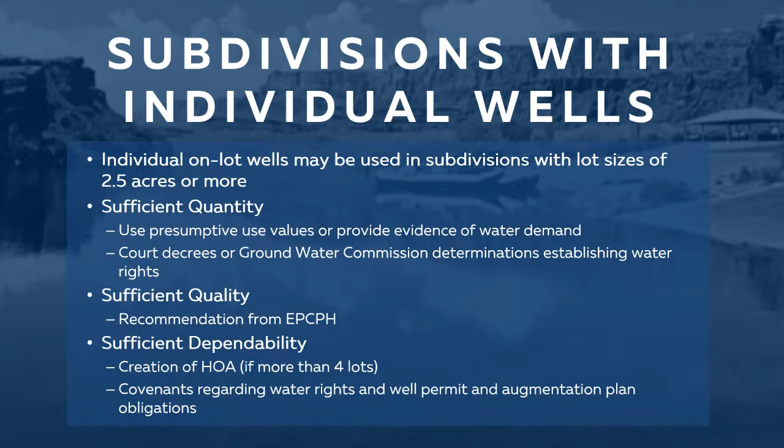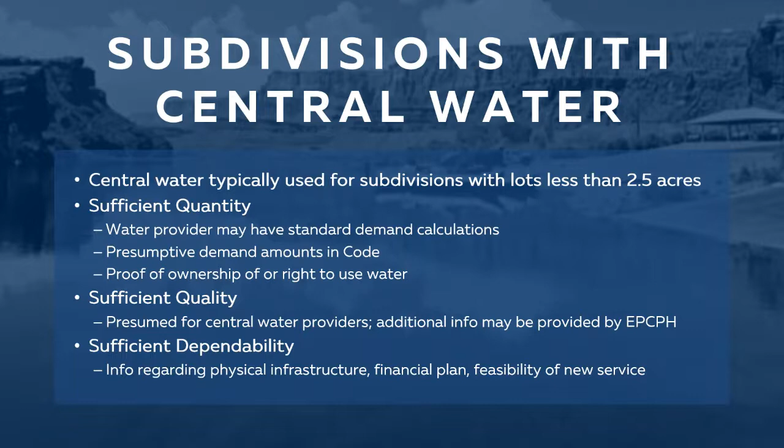Next slide. New central water systems occasionally arise when central water will be supplied, but there is no existing provider willing or able to provide that water. And so when you are creating a new central water system in connection with your development, just a couple of highlights and tips. Pre-planning is key here. It can take up to a year or more to get the state approvals for a new water system that we require in order to support a finding of sufficient water dependability.

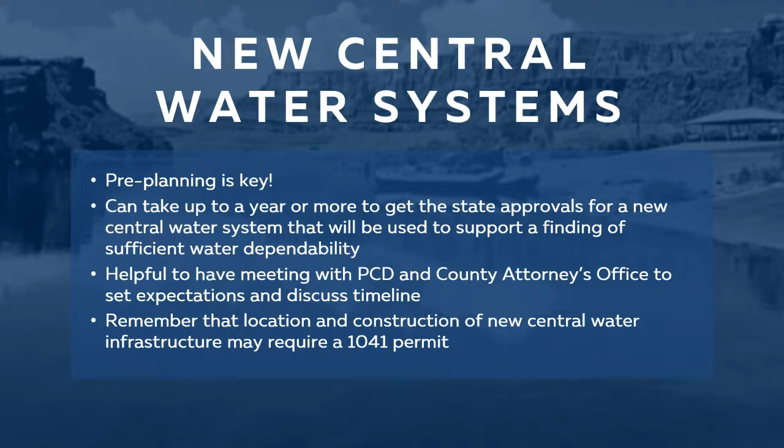We have to determine that the construction and the approval of the system is advanced enough that we can comfortably recommend that the water supply is dependable. It is helpful to have a meeting with the Planning and Community Development Department and the County Attorney's Office early in the process to set expectations and discuss timelines in terms of what will be required and when for this process. It's also important to remember that when you are constructing a new central water system, that location and construction of that infrastructure may require a 1041 permit, which is a separate application and a separate process.

I think I'll pass it on now to the state in order to discuss new water systems in more detail. So Nina, I think this is Tyson's turn. Do we have him on the line? Yes. Wonderful. Hello, everybody. Can you hear me okay? We sure can. So if you want to go ahead and discuss new water systems. Great. So you're on slide, what is the public water system, correct? That is correct. So we are on slide number 13.

Great, thanks. So my name is Tyson Ingold. I work for the Colorado Department of Public Health and Environment, the State Health Department, and we regulate many different things. We've been very busy with the pandemic, but we also regulate public water systems and implement the Safe Drinking Water Act of Colorado. So I'll be discussing what qualifies as a public water system, what our oversight looks like, what types of things you have to do if you're a new development, for a few slides, and then obviously around for questions.

So I think first and foremost, let's talk about what is a public water system. That is a definition provided for us by the U.S. Environmental Protection Agency and the Safe Drinking Water Act, an old definition from the 1970s. I'm not going to read the definition, but the rule of thumb for a development is if it supplies 15 service connections or 15 homes, it's going to be regulated as a public water system. But there is also a second part to the definition, which sometimes means that systems that don't have 15 homes also are regulated as public water systems, and that's the 25 or more for 60 days a year. And I'll explain that calculation in a sec.

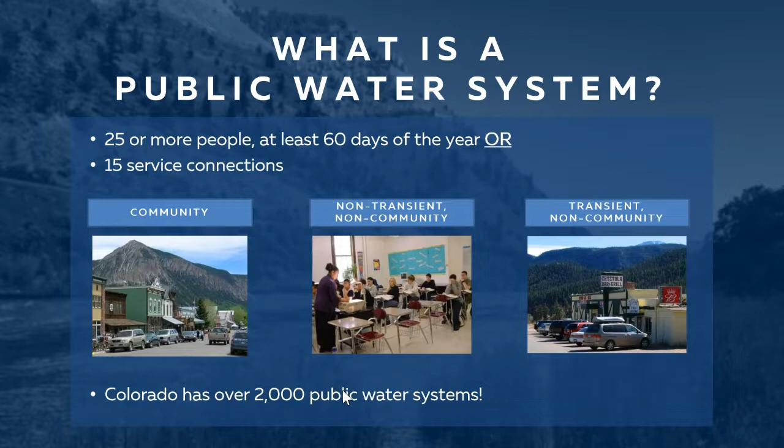To go on this slide, this is state regulatory requirements. Anybody building a new water system needs to come into the state for design approval on several levels. And this is really established on a few different scales. It's in state statute, but it's also in our drinking water regulations that you must submit for approval before you begin construction of any water treatment or before you turn on a well. So that can be confusing because you sort of do have to drill the well through the Division of Water Resources to get us the data we need for you to move forward with the drinking water design. So it's kind of a two-phase deal.

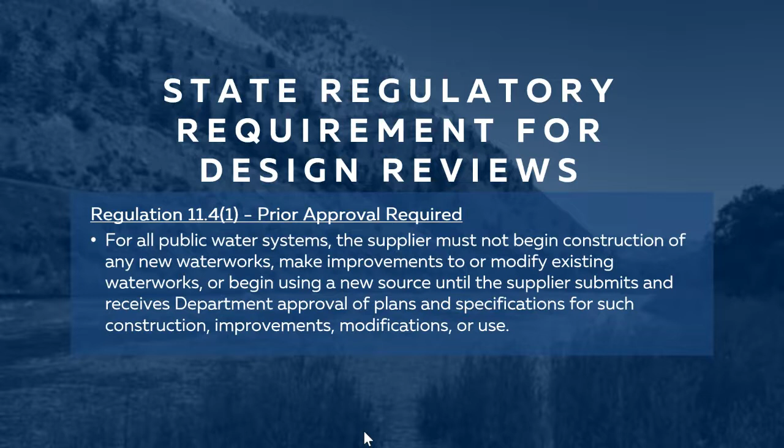You develop your sources, but then you gather some data and submit to us and get approval before you go on and develop the water treatment and the rest of the system. And that is required in our regulations. You're in violation if you do it without our approval. For brand new developments, in the next slide, there's a second requirement.

If you're going to be a community water system, you must establish that you have what we call capacity: technical, managerial, and financial. In other words, you need to establish that the water system will be viable in the long term, both in how it's operated and managed, and also how it's financially set up so that it can pay to replace pipes as they break, or new water treatment, or to develop replacement wells when they reach their working life, those types of things.

So you'll be sharing with us the overview of your system, but also how it can be managed and operated, and also how the finances are going to work. And that's called the TMF Capacity Planning Manual, or Policy 11, but you must submit and get approval of that. And that's kind of a standalone document. If it's a brand new, built from scratch development, we need to do that piece in the community.

And then also for treatment, sources, and storage tanks, the next slide talks about a basis of design report that must be filled out and submitted to us. And that's the second thing. It's Appendix B of our design criteria, but it goes through your system, and we want to look at how all of your water infrastructure is designed. And really what we're primarily focused on is your source, and your water treatment, and then any water storage tanks. The actual pipes in the ground, we have design standards for. We don't typically do too much of a review of those.

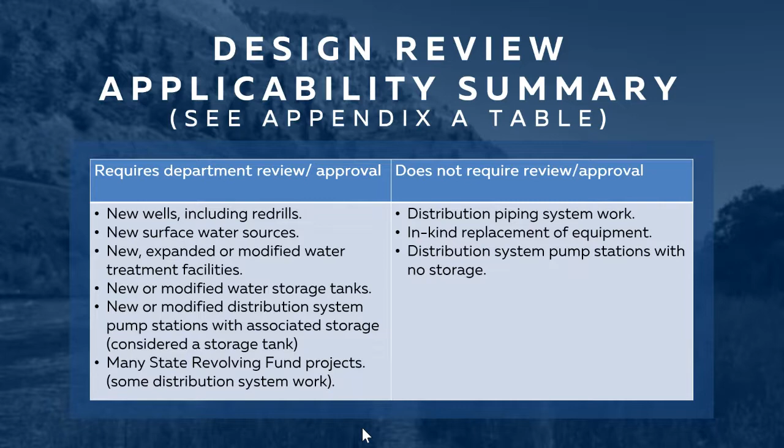And that's kind of the limit of what I'm going to talk about. I'm going to hand it off, but I'm obviously here for questions. Thank you. That was great.

So now we're going to get into the actual sufficiency review process, and we'll discuss how planning and community development coordinates with the applicant, as well as the state, our county attorney's office, our health department, and the various hearing bodies to ensure that a finding of sufficiency can be made. So first and foremost, let's discuss what documents have to be submitted to the county. All of our documents are submitted online through our EDARP program. We do all of our applications and all of our reviews online.

The absolute minimum documents to be submitted would include the water supply information summary sheet, and the state is going to go into more detail about the content and what they're doing in their review of that document. The water resources report does have to be prepared by a qualified professional, specifically a hydrologist, a licensed civil engineer, a qualified groundwater geologist, or some other qualified professional that has the appropriate experience. So this is not something that an individual homeowner would be able to prepare on their own.

It also needs to include documentation and information to support all three elements of the finding of sufficiency that Ms. Segal went over, including quality, quantity, and dependability, so that we can make that finding. Next, Section 8.4.7 of the Land Development Code outlines the specific requirements and content for the water resources report. Additionally, sometime this summer, we anticipate that we will have some actual checklists that applicants could use to quality control their water resources reports before submitting to us.

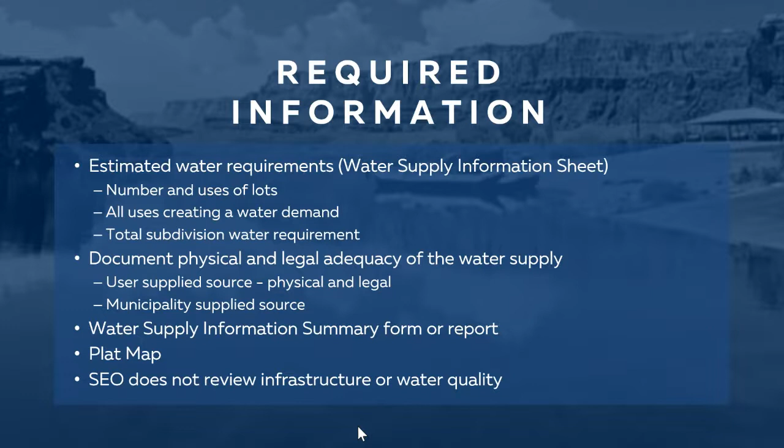We do our review. We are checking to make sure that the proposed uses are consistent with the allowed uses of the proposed supply of water. And in designated basin, which is a geographic area along the eastern half of the state, there are specific rules about exporting water outside of those basins. Because they rely on that groundwater, it's an area that doesn't have a lot of surface water available. We want to make sure that where they're using that water is appropriate and legal. They also have specific groundwater management district rules that might come into play, so we cross-check those.

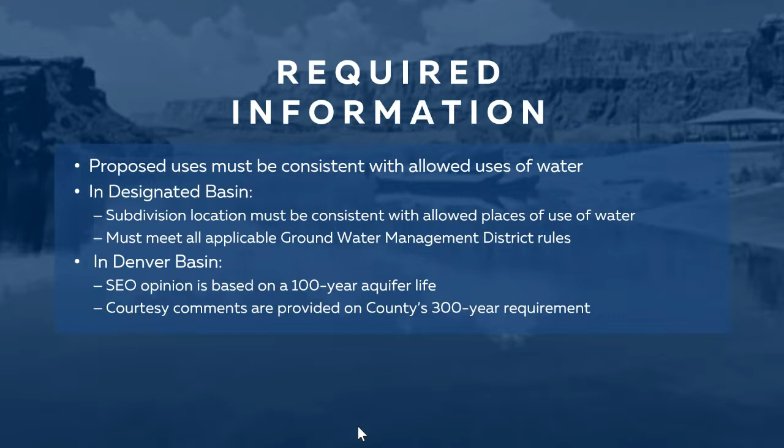The Denver Basin is a series of aquifers that are layered along the Front Range. They also have their own set of rules that we need to check. As Lori said, statewide we rely on a 100-year aquifer life for our determination, but El Paso County has taken that additional step to make sure that a 300-year aquifer life is available. So we'll offer that review as well. Next slide, please.

For a supplier via municipality or a quasi-municipality, we'll check the statement of commitment from that supplier. In particular, we really want to see a firm volumetric amount that's been committed to the proposed subdivision. Sometimes we'll receive letters that say things like, yes, this project is within our boundaries, but we really want to make sure that they do have an available amount of water that meets the demand for the subdivision and to make sure they have enough water to supply that water.

One way we check that is the report that was mentioned that documents what the legal supply of water is for that municipality, as well as the commitments they've already made to other projects. We want to make sure that they're not overextending themselves and that there's not limitations on their supply of water for where they can offer that water or the uses.

Occasionally we will ask for an updated report. We do keep those reports on file in our office. In particular, if the report is more than 3 years out of date, or if the supplier has committed more than 90% of their available supply, we'll ask for an updated report just to make sure that we're not running into any trouble. Next slide, and Finlay, please.

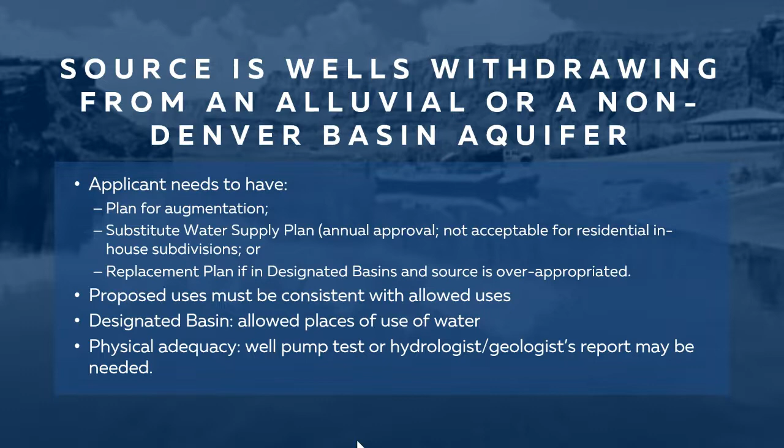So if the source are wells or a well from a Denver Basin aquifer, that can either be from water that's been formally allocated or water that has not been allocated. So water can be allocated inside Denver Basin either through the issuance of a non-exempt well permit or a decree from the water court, or if you're inside designated basins, through a determination of water rights.

If you're in a not non-tributary source, so the aquifer has some hydraulic connection to surface water, the applicant would also need a plan for augmentation approved by the water court, or if you're inside designated basins, you would need a replacement plan for sources that are not non-tributary with an actual replacement requirement. Next slide, please.

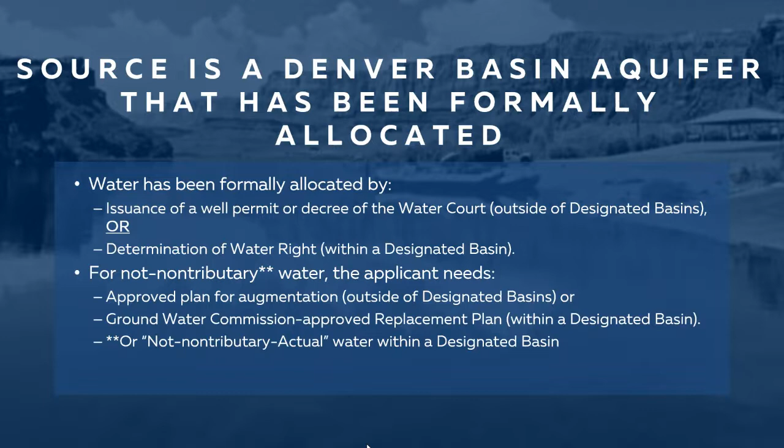And then for wells that are withdrawing water that has not been allocated, that would be a small capacity well permit if you're inside designated basins, or an exempt well permit if you're outside of designated basins. These well permits aren't typically associated with a water right, so the water that the wells are withdrawing is not allocated. If you're inside Denver Basin, if you are in a non-tributary source and you don't have water that's been allocated, sometimes you can still use those wells, but in this subdivision, the wells would need to be re-permitted according to the new parcel size.

So if you're in a non-tributary source, it depends on if you're subdividing or not, whether you need to re-permit the wells. If you are in a subdivision, the amount of water that's allocated for each parcel is calculated by using the land area over the aquifer. So for subdivisions where there are multiple lots of different sizes, we look at the amount of water beneath the smallest lot. So that's the minimum amount of water available, and compare that to the estimated water demand that's been proposed and make sure that those are in agreement with each other.

You can't have parcels that, quote, borrow land from other parcels to increase the amount of water available. So for example, if you had a 10-acre lot and a 30-acre lot, the 10-acre lot can't borrow land area from the adjacent lot in order to increase the amount of water available when we're reviewing subdivisions. So that's just something to keep in mind if you're creating a subdivision with lots that are different sizes inside of Denver Basin. Next slide, please.

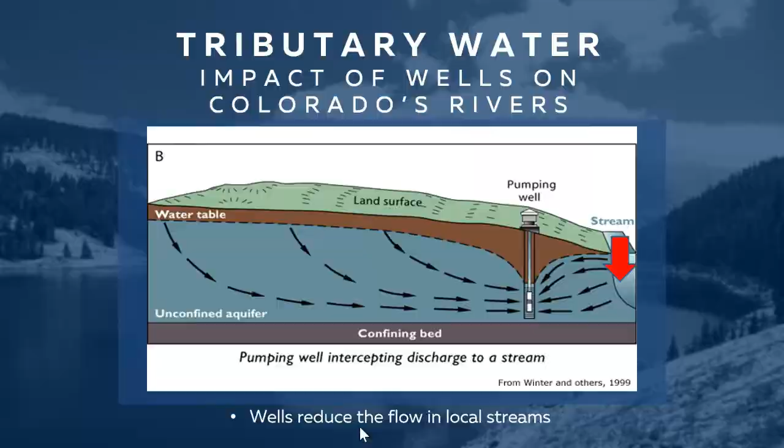And this is how a lot of aquifers are outside of Denver Basin. Inside Denver Basin, there would probably be a confining layer that would separate the stream and the groundwater, which is why Denver Basin aquifers are administered differently. And then I'll hand this back off to Kate.

Thank you. So as Finlay said, when you have a tributary water supply that's pulling water from the stream system into a pumping well, one of our concerns is how does that impact senior water rights? With a surface water right such as a ditch, if the water right on a ditch goes out of priority and can't operate for a day, let's say, we can shut off that ditch and prevent injury.

With a well, the depletion can continue to be felt by the stream system for days or months or years. So it's not really feasible to have people just turn off their wells during certain times of the year. Instead, we really do rely on those augmentation plans. The augmentation plan is approved by the water court, and it will describe how that replacement water is being sent back to the stream system so that the pumping well is not injuring senior water rights.

The replacement water does need to be provided in time, location, and amount to prevent injury, and will be required in areas where there's a shortage of water. In other words, if there's more demands on the stream system, more water rights, than there's physically water available during summer, all times of the year. And in El Paso County, outside of Denver Basin, that's always the case. All of El Paso County is considered over-appropriated.

Some sources for replacement water include a reservoir right that's been decreed for augmentation plan, a changed senior water right. Typically that would be if an irrigator has decided to no longer irrigate a field, they could take their senior water right to court and apply to have it changed to augmentation and make it available to someone else to purchase and apply for their plans. Trans-mountain diversions coming from the western slope and recharge credits. That's usually when you're directing water from your pumping well back into the aquifer system to recharge it.

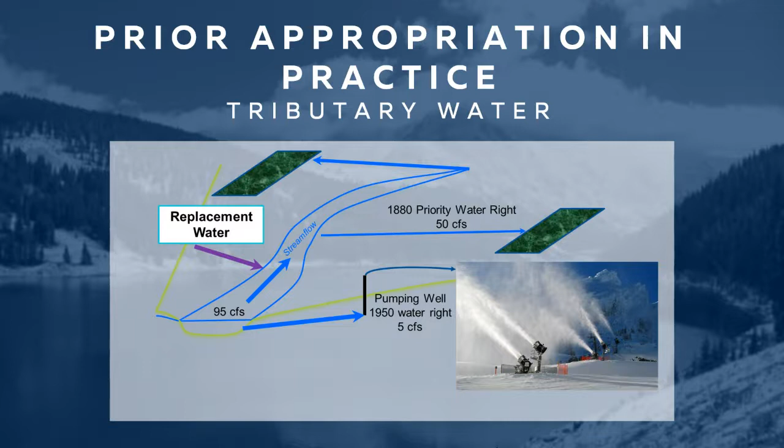Next slide, please. So in practice, what this looks like, very simply, is if there's a senior water right downstream with an 1880 water right, and they're legally allowed to divert 50 cubic feet per second for irrigation, but there's a well upstream with a much junior water right of 1950. If they start pumping their 5 cubic feet per second, it does impact the stream system, and that downstream senior water right user won't be able to get their full legal allocation.

Instead, the well owner will have a replacement water supply through their augmentation plan that directs water back into the stream system above where the irrigator needs it, and that way the stream system is considered whole, and the water rights priority system continues to operate.

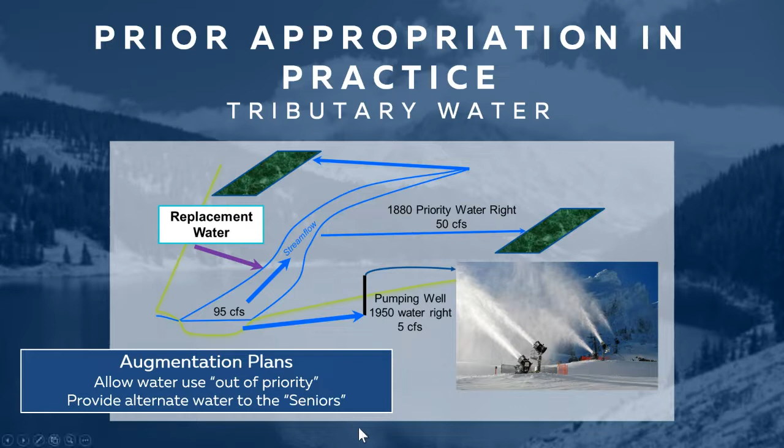Thank you, Lauren. I am Kat McGarvey, the Water Quality Program Manager for El Paso County Public Health. And up till this point, most of what you've heard has been based in quantity and infrastructure. Where El Paso County Health comes in is through the quality part. So the process between central and private well water sources doesn't really differ. We have the same process no matter what type of water you are providing.

When we do the reviews that are submitted to us as a part of your submission to the EDARP system, we are reviewing those to meet minimum water quality requirements of the Colorado primary drinking water regulations. So there's a defined number of constituents that we look for. Some of those can vary based on aquifer that you are in as well. Those water quality results are submitted with your subdivision plans. Those constituents are tested and are based on the requirements for each aquifer.

As I said previously, representative samples have to be analyzed by a certified laboratory. And those laboratories will produce a report which must include the results of every sample analysis completed. Next slide.

Lauren, do you have the next slide up? There we go. No. Lauren, are you there? Lauren? Seems like we've lost Lauren. That's okay. I can still talk and we can catch the slides later.

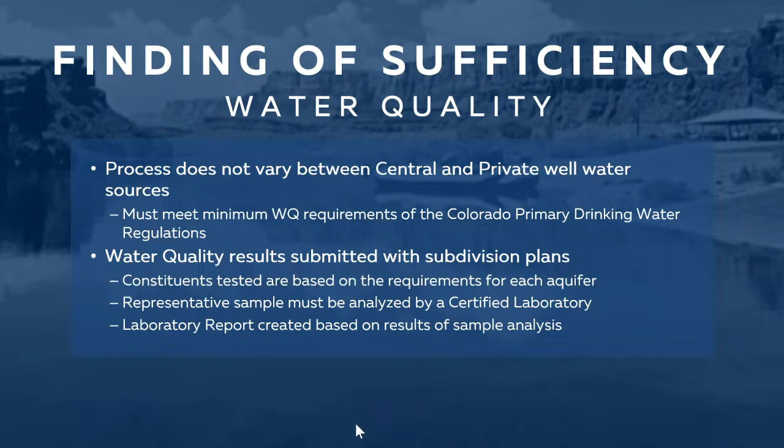So when we are making determinations for our sufficiency in terms of the water quality after reviewing the laboratory sample results, we are looking at each of those constituents that was tested with respect to the maximum permissible contaminant levels, or what you would see on your report labeled as MCL. So each of those constituents are analyzed against that MCL level that's established as a part of the Colorado primary drinking water regulations.

When constituents exceed the MCL, we have a couple of different paths we can go. Resampling may be a priority for the subdivision creator. Otherwise, depending on the specific constituent and how far it exceeds that MCL, we may determine that recording a plat note is the most appropriate method forward. In many of those cases, it's used as a disclosure purpose. So when lots are bought or sold, the note is tied to that specific lot for the next owner's awareness. Some of those notes can also recommend some under-counter treatment units or some sort of treatment unit for the specific constituent of concern.

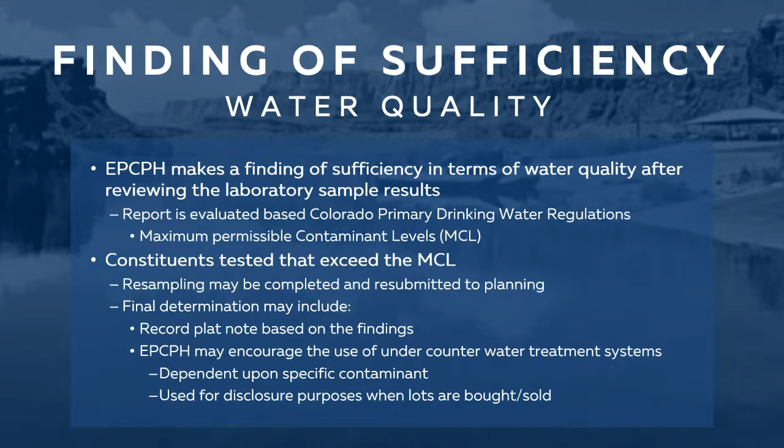Are we back? Yeah, sorry about that, Kat. Are we on the, we just finished finding of sufficiency water quality? Yes, if you want to go to the next slide. Yes, ma'am. Sorry about that.

No problem. Thank you. The final water quality sufficiency determination has to be made before the final plat is submitted. So this is where we would review any additional information from previous comments and/or testing that was submitted. And then we will make a final recommendation of water quality sufficiency at that point.

Any lots that are sold that are on individual wells are also subject to total coliform testing. That typically is done at a local laboratory, such as the one at El Paso County Public Health, where we look for just the presence of general bacteria that's found in the ground. Those tests are done on an individual well basis and have to be completed before a certificate of occupancy will be issued.

The only other thing that we might note as part of the recorded note to plat is there are some areas, specifically in reference to the PFAS concerns here in Colorado recently, where there may be a site determination that has an MCL with those as well that may not necessarily be found in the Colorado primary drinking water regulations.

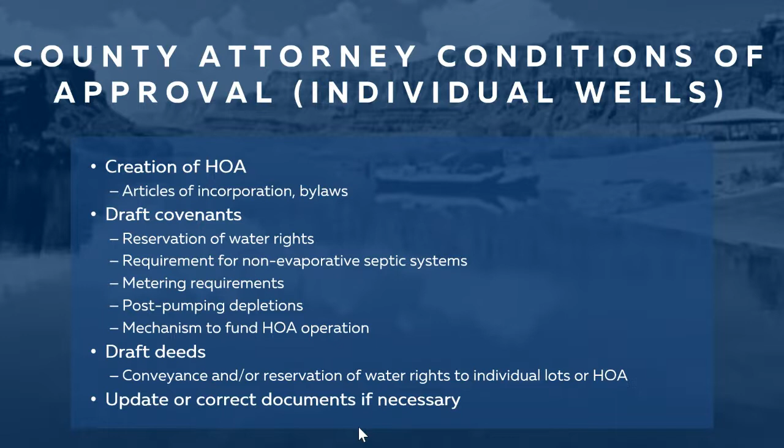So let's see, we're going to go ahead and get started. A lot of these people just put anonymous, which is totally fine. So whoever of our presenters would like to jump in and answer these, feel free, and we can make sure everyone gets a chance to chime in if we have multiple agencies who want to give feedback on these.

So the first question we're going to go to is whether or not you need to separate out the water supply report from the water quality report. And they added that, assuming that this is related to quality of water supply and not the OWTS requirements. Does anyone want to jump in on that one? I'll read it one more time. Okay, Kat. Sorry, you can read it again, but I can also. No, go ahead. It was phrased a little differently.

So one question that has come up is whether you need to separate out the water supply report from the water quality report. And I can answer that. When we revised the regulations at the end of 2019, we did say that the water quality report is a component of the water resources report. So those no longer need to be separated out.